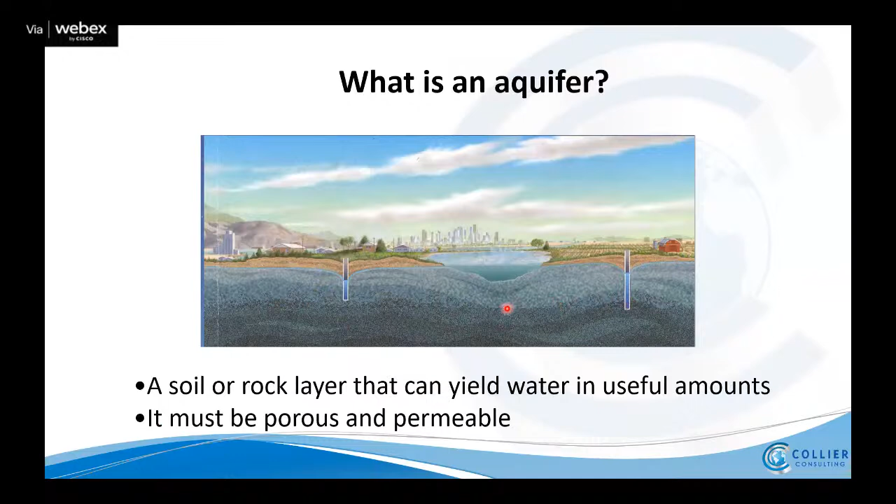So we're just talking about the water that saturates the soils and rock beneath your feet. In this picture, you can see the ground surface, and then there's some space of soil or rock that is actually not saturated. That's called the vadose zone. It's above the water table, but you get to a certain depth and everything's saturated, all the pores are saturated. So that is simply what an aquifer is.

But there are different types of aquifers. The one people are probably most familiar with is sand and gravel or sandstone. This would be called a porous aquifer, where you've got some type of sand grain with a pore space in between, so the water flows through these pores. These are in some ways the simplest aquifers, and there are a lot of them in southeast Wisconsin, just not a lot in Germantown.

The next type of aquifer would be a fractured controlled aquifer. That's where you have a pretty tight rock, like igneous rock, granite or basalt, but this could also be like limestone or dolomite, where the rock is really dense but fractured, and the water can move through the fractures. This is a very common type of aquifer in the central part of the state, up around Wausau and anywhere you have granite near the surface.

When you have limestone or dolomite, it's a fractured aquifer, but the rock itself is soluble in water, so water moving through it enlarges the fractures. You get bigger fractures and some little voids. This would be a solution enlarged, or some might call it a karst aquifer. This is similar to the fractured aquifer, but more permeable, so you generally get a lot higher yields. This is pretty much what the dolomite aquifer in Germantown is — it's a fractured aquifer that's got karst enlargement.

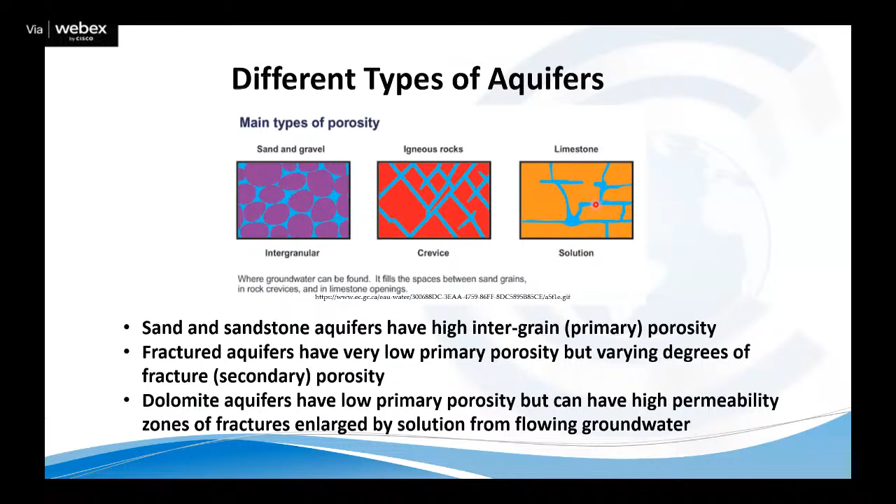So how do we think about an aquifer? This is a real simple graphic I use, and I don't want to insult anybody's intelligence here, but I'm just trying to get a couple of basic points across.

You can think of an aquifer as basically a flowing system where water enters at some point of recharge, and these tend to be the high areas. It flows through the aquifer, and eventually finds surface water and discharges. The aquifer itself acts like a big bathtub, a big storage vessel. So you have many years, decades, or even centuries of recharge stored in this bathtub. You have water coming out that's roughly equal to the recharge, but you have this big storage vessel, the bathtub that is the aquifer.

And even though the groundwater moves very slowly, maybe feet per year, maybe tens of feet per year, it's almost never stagnant. It's almost always moving from recharge to discharge through the system.

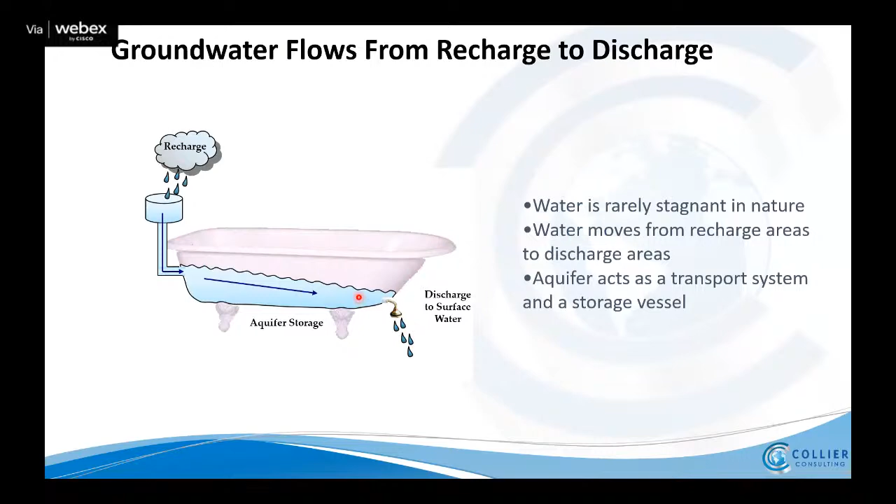So this is a schematic that's more realistic. This is an aquifer system where we've got a ground surface, and then a vadose zone or unsaturated zone, and then water falling from precipitation that percolates through permeable soils, makes it to the aquifer, and then flows along the aquifer until it finds some type of surface water to discharge to. In this case, it's showing a little stream here.

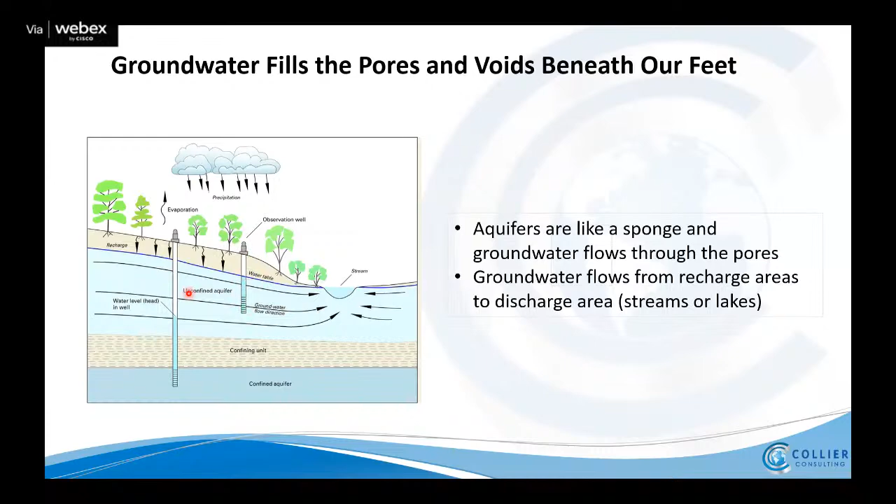In the Germantown case, the actual recharge, a lot of it would be occurring west, say in Richfield, where you've got sand and gravel, permeable units at the surface, and the topography is higher. So the water's entering the aquifer in this area. It's flowing through the dolomite, and in this case it's going all the way under Mequon, and discharging in Lake Michigan. So it's a fairly large flow system, and we tap it by putting wells into it to intercept that flow and pump it to the surface.

So of the aquifers in southeastern Wisconsin, the sand and gravel is one of the more important aquifers. It's present a lot in Richfield, but it's very limited in Germantown. And here we're just talking about the glacial sand and gravel that was left behind.

This is a quarry, I believe it's in Waukesha County. But you can see we just have a lot of sand and gravel, and the sand and gravel has pore space that can hold water and transmit it to a well.

So this is a lot of the wells in Richfield. West Bend has several sand and gravel wells. Jackson does, Slinger does. There are a lot of communities that have good sand and gravel wells. In Germantown, there is not as much sand and gravel, and it's thinner. So there are some private wells in the sand and gravel, but there are no municipal wells in the sand and gravel in Germantown.

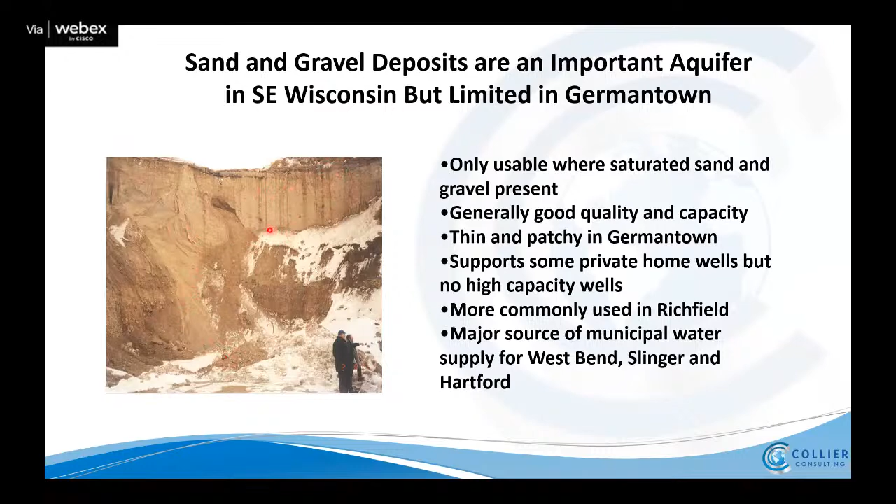Beneath the sand and gravel, you have the dolomite bedrock. People will call it limestone. In this case, it's actually dolomite, which is chemically a little different than limestone, but it behaves essentially the same.

So not all, but most of your domestic wells and half of your municipal wells are in this dolomite aquifer. And this is just a little side note.

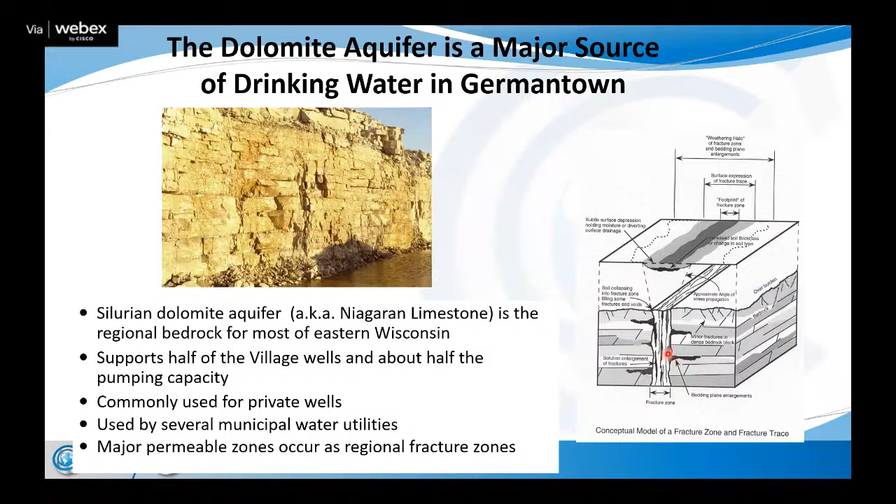It's got these fractures coming out, and that's what we're looking for. That's where the water flows in the dolomite.

So this one, we spent a fair amount of time doing geophysics and other hydrogeology to find this fracture zone and drill this well on top of it to get as much water as we could. This well was drilled in the late 80s, I think 87 or 88, something like that. I found the well for you. That's one of the first things I did for Germantown.

Well, when you pump a well, you normally get a nice ring pattern of drawdown. You pump a well, you pull the water out of the well. That causes water to flow in, and that depresses the water in the aquifer adjacent to the well. That causes water to flow from the aquifer by gravity towards the well. So you're using the pump to lift the water, and you're using gravity to drive water through the aquifer to the well.

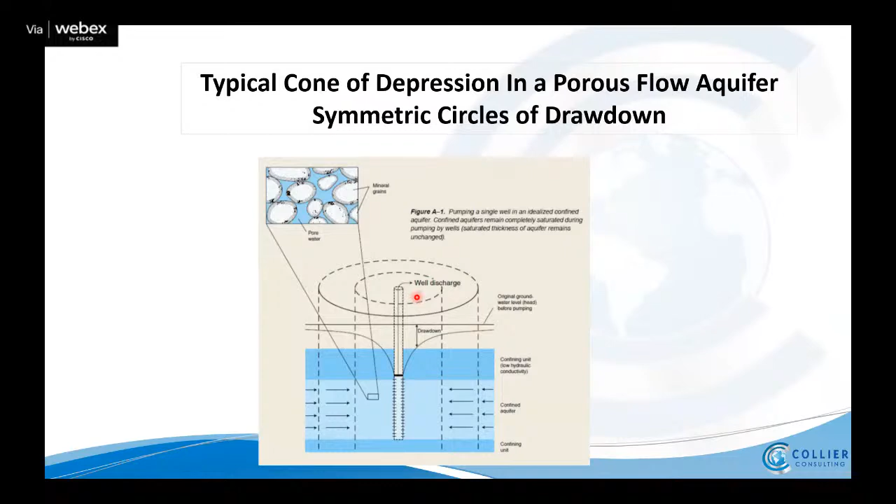Once again, that's one of the dolomite wells across from the village hall. This was done shortly after we found the well in the mid-90s. We pumped it at 1,000 gallons a minute, which is like 1.5 million gallons per day. That's a lot of water. We pumped it for almost 2 days.

And instead of seeing nice concentric rings of drawdown, we saw linear drawdown along the fracture zone that we knew about.

We actually saw a perpendicular, almost perpendicular, intersecting fracture zone with drawdown along it. This isn't uncommon for dolomite wells in major fracture zones. The fact that the fracture zone is there is why you get as much water, why you can get 1,000 gallons a minute. Most dolomite wells would be much less than 100 gallons a minute—10 or 15 would be a good well. So getting 1,000 gallons per minute means you found a very highly permeable, fractured, and solution zone. That's what we look for in these high capacity wells.

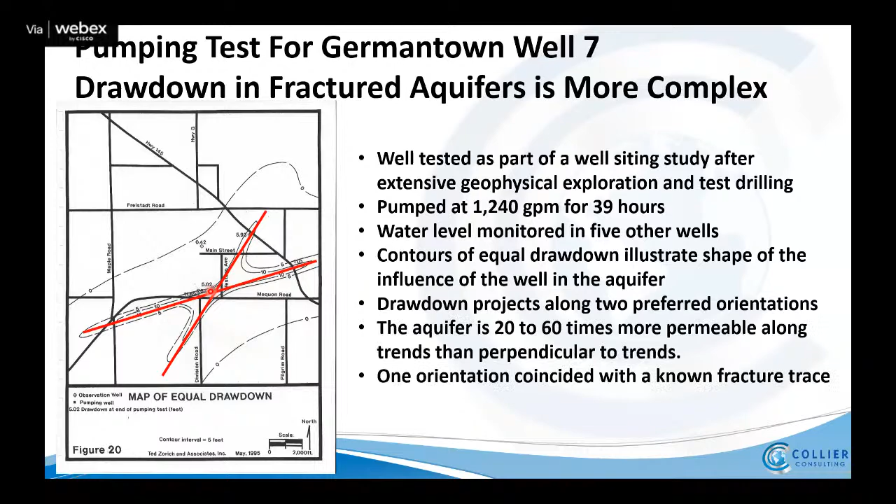The last aquifer present in Germantown is the sandstone aquifer, the deep sandstone. Some of you might have heard of this aquifer—it was the one getting all the attention, that had radium in it, and was drawing down so badly in Waukesha County that people were worried. There was a time when people thought Waukesha County might run out of water, which wasn't true, but that was in the media. The sandstone aquifer is basically a series of sandstone, shale, and some carbonate like dolomite and limestone layers that are at the surface in the Wisconsin Dells. If you've ever done a duck ride, you're looking at the sandstone aquifer right there.

These same rock units are present in the village of Germantown, but they're about 1,000 to 2,000 feet below the surface. So they're down there, saturated, and can support high capacity wells. It's not uncommon to get 1,000 gallons a minute out of a sandstone well, which is a lot of water for a municipal well. Three of your wells are in the sandstone, and about half your pumping capacity comes from the sandstone. And I forgot to mention, three of your wells are in the dolomite, and about half of your water comes from the dolomite.

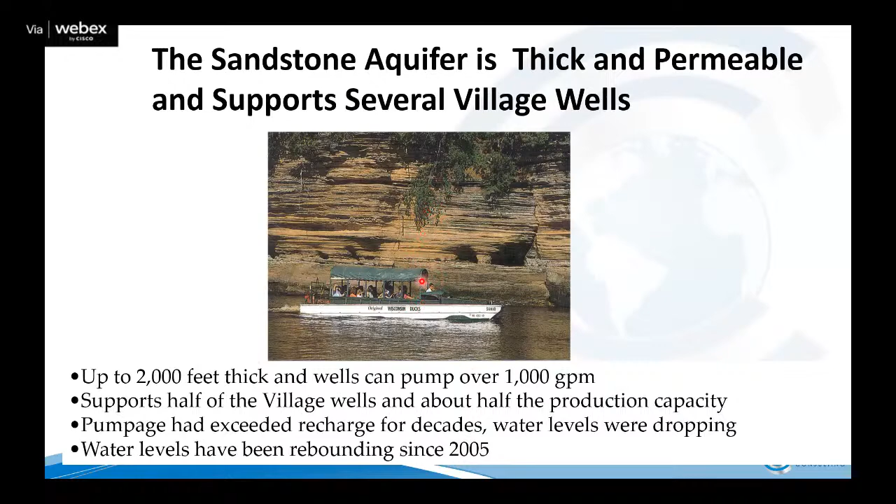There was a big fear of the sandstone running out of water because it was being pumped so hard through the 90s and early 2000s. But then a lot of communities went off the sandstone, so water levels have actually been rebounding since 2005, up over 100 feet in various places. There's plenty of water in the sandstone now, so your sandstone wells are fine.

Now, just to talk a little about well 12—we worked with the engineer that had the contract for the well, acting as their hydrogeologist to help design and test it. Initially, well 12 was going to be constructed as a sandstone well, drilled through the limestone to the base of a shale unit that separates the limestone from the sandstone. This shale unit is called the Maquoketa Shale—it's about 200 feet thick and totally isolates the limestone from the sandstone, so there's no drawdown in the limestone when you pump the sandstone. The initial plan was to drill through, set casing at the base of the shale, grout it up to seal off the limestone, then drill down to about 1,400 feet and pump 1,000 gallons per minute, plus or minus, out of the sandstone. That was the initial plan.

While the limestone was being drilled, at about 200 feet we started picking up big fractures and making a lot of water. Going back and looking at some of the mapping I've done, it was actually very close to a mapped fracture zone. So in retrospect it wasn't a surprise that it hit a lot of water, but we hadn't really planned on that going in, because the initial thought was a sandstone well.

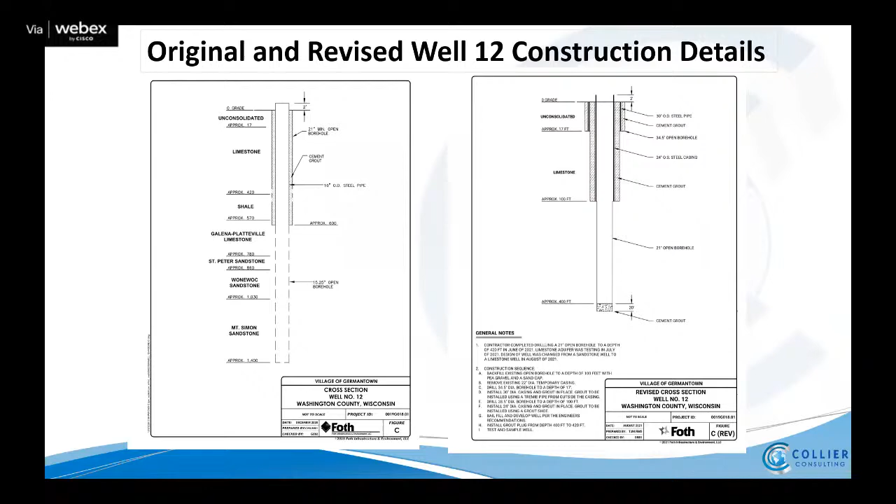To determine the capacity and see what impact the well might have on surrounding wells, we ran a pumping test in July of 2021. This is well 12, and the village was able to get permission from 5 private well owners to monitor water levels in their wells while we pumped well 12. We went out and put in data loggers, pressure transducers that record water level roughly every minute, so we could see how the water levels changed in these private wells while we pumped well 12.

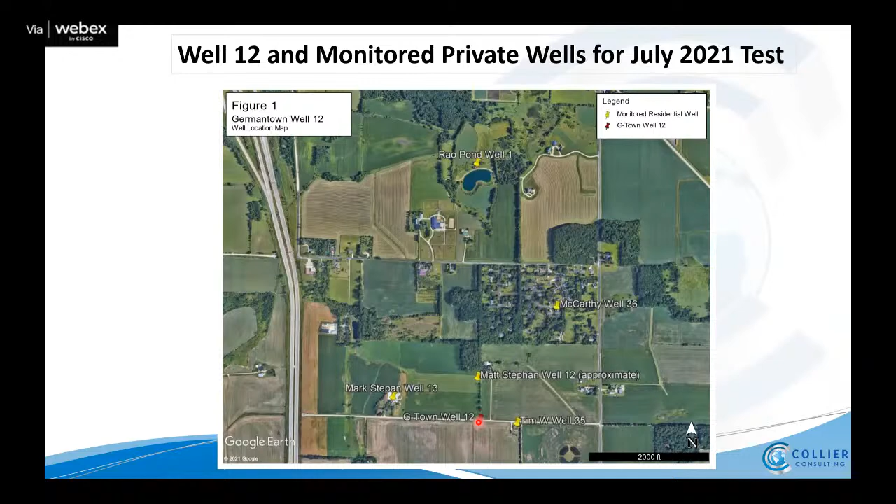Well 12 was pumped at 800 gallons per minute for roughly 3 days. That's over 1 million gallons per day, roughly 1.1 million gallons per day, which is a lot of water. It's an excellent producing dolomite well.

At first we weren't quite sure what they were, but then we looked at the pumping of the other village wells. So this is the same drawdown curve, just on a different scale. This is actually depth below surface, so we're starting at 70 feet and dropping down to less than 90 feet. And you can see that same drawdown and recovery pattern, but the gray bars represent when the other village wells were running.

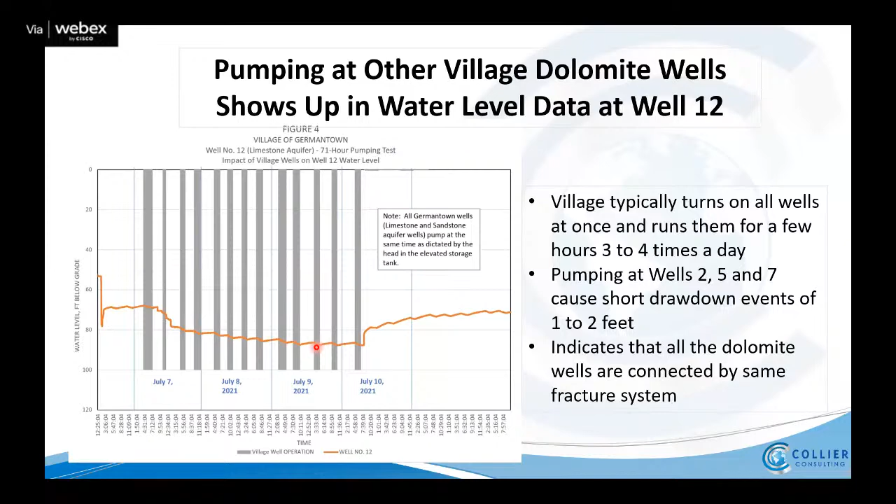So this is the result of what we found after 3 days of pumping. We had 16.1 feet of drawdown in well 12. The 4 closest wells had roughly 7 feet of drawdown, so roughly less than half of what we had in the pumping well. That would indicate that they're pretty well connected, but there's some resistance to the flow between them. So they're tightly connected, but only about half the drawdown.

Now there was this one well about a mile to the north, the pond well here, that had 13 feet of drawdown. That's not quite twice as much drawdown as the closer wells, so that's unusual—you'd expect it to be lower. That means there's some preferential flow path between this well and the pumping well, so it's more tightly connected than these other wells are.

So the takeaway is that if you run this well at 800 gallons a minute continuously, you will get about 16 feet of drawdown in the pumping well and something around 7 feet of drawdown in most of the surrounding wells. That would probably apply to most wells in the subdivision, but you have some outliers that might have a little more.

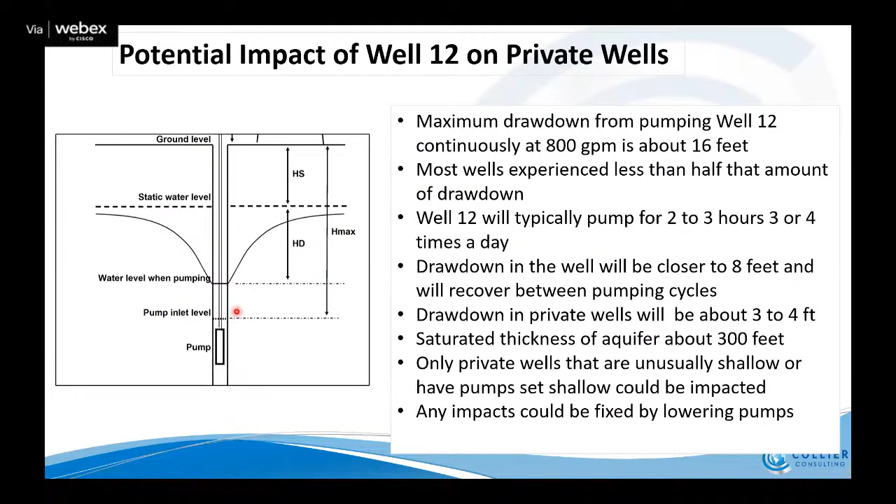I know I kind of rattled on, but I hope that gives you a feel for your aquifers and the situation around well 12. I guess it's up to the village, but I'd be willing to answer any questions.

I asked for this information for two reasons. First, I wanted to get answers on why we did the dolomite well rather than the sandstone well. I was part of that process, but wanted more information on why it was recommended. More importantly, as we start developing a well protection plan for the wells around there, I wanted to understand the expectations, so when we develop that plan we do the right thing for residents and make sure the protection that's needed is there. That was the reason for this presentation. Are there any questions for John?

Terry: Yeah, I've got a few questions, John. Thank you, it was a great presentation. These aren't all going to be interconnected, I'm just going to go through them as I wrote them down.

Is there a presentation, Mr. Chairman? No, I see that now.